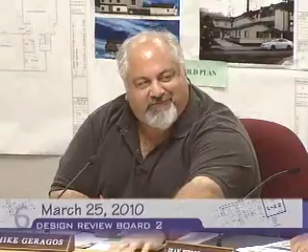Oral communications. Is there anybody in the audience who wishes to speak on an item not a part of this agenda? Everyone here wants to speak on an item on the agenda. Any speaker cards? If anybody needs to fill out one, please fill one out.

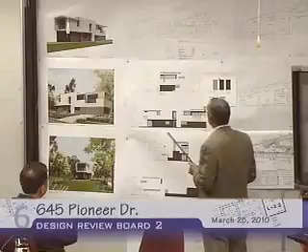When you go through the code and the site analysis, you find that because of the way the site is shaped and the setback requirements, the whole building, in addition to being triangular, goes to another level. Then you end up with an average setback, which sets back the triangle even further and creates these very interesting shapes that jog, especially on the north side, which you see right here on the plan. So that opened up a whole new series of opportunities.

Very early on in the design, mainly in the site planning stages, it was really important to make a decision on direction — is this a site that really warrants a more traditional design, or does it warrant a more contemporary design?

So we discussed it with the owner, and the conclusion was that because of the shape, the setback, and what it was coming to be — this sort of extruded triangular box — we tried to visualize how you'd make something like that look traditional, or put gable roofs in a staggered form. It just didn't make any sense. So it was very clear to us that the more contemporary, modern approach was really appropriate here, and we sailed with that idea.

Now, having mentioned that it's actually a triangular volume that gets extruded, and all these different staggering planes occur — that also happened in addition to satisfying the code.

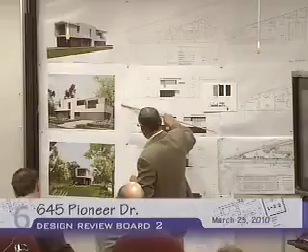So that addresses the condition where the neighbors next door can look at this building, which is over 20 feet high. There's also an overhang with an opening, and we recessed this south plane even further back to create a balcony for the master bedroom, which helps. This part is 25 feet from the front property line; the building here is also 25 feet, but set back another 5 or 6 feet further. So when you're going out the door, you're not looking at a flat plane — and that was very important, and we felt we addressed it fairly well.

As you move along the south side of the building, the idea of relating to the neighbors is expressed by change of material and by creating a horizontal line that relates to the one-story scale of the neighborhood. It's also made dark for that purpose, so it becomes obvious that that's the ground level, meant to relate to the other pieces at that same height.

The upper story is a little lighter in color, and it sort of floats above the first floor. Another reason the color is darker below is so you get the impression that the second floor is an element that floats.

As you move towards the west, we're playing some very interesting games with the architectural expression, where from this plane, which is slightly recessed, you have another plane which is slightly moved in, and another plane moved in again, creating recesses on the ground level for the same reason we did on the east, to create a sense of scale for passersby and people living across the street, so this won't be one vertical plane. Imagine all that being one material - it would be a bit too much.

By doing all the staggering, this last room, the family room - living room is in the middle, family room is at the end. The main thrust of the building is really in this direction because of the shape of the building, so everything tends to point and look in that direction, and the architectural form takes that into account.

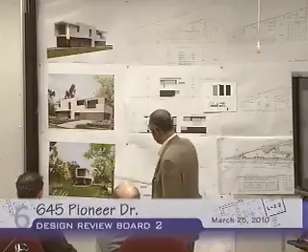Landscaping is responsive to the needs of today, which is drought-tolerant planting. There are some really wonderful trees that our landscape architect put in - these are London planes, which not only define the edge, but also create a really nice, wonderful outdoor space.

We think that this project will be a pleasant addition to the area, because right now there's a freeway wall that you're looking at.

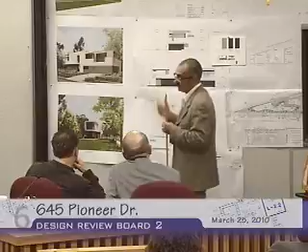You're going to have some shades. So the member is deeper, meaning the structure is shaping it. You might end up with a shape maybe about 6 inches or so below that, maybe more, because remember there are no parapets.

These are basically curbs—you have a curb that comes down and then slopes to a drain. We're trying to keep that as thin as possible, but your question is a good one because this structure can't be independent.

It will probably be added to the main structure. In the section I've done, basically you go up, you slope, then you step, and then you go straight or horizontally across. But when you look through the glass, you'll probably see a surface maybe a foot or so behind there—there's really no other way to do the thin stuff.

I just wanted to see how you'd do it. From far away, because of the reflectivity of the glass, I don't believe that will be that noticeable.

Okay, do we have any other questions? I just had one—same issue. It looks spectacular, I'm very happy with the design.

But it's one of those things where you wonder how that perfect white goes from soffit to fascia to roof, and how that actually looks 5 years from now. So I'm wondering—is that just a drip edge up there? How are you thinking of that?

It looks so great, and then you have other ones where the wall turns in, treating it all the same. The idea is to make everything look like it's one material that can wrap—it's sort of the Schindler concept, where you never actually separated the material, because it's this plastic material that you shape.

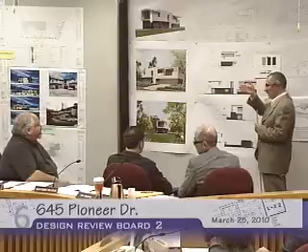Another way to do a drip is to put a sharp edge right at the corner, so it drips down and then gets painted and you won't see it. But you probably need a drip edge at the bottom also so you don't run back, because when water collects on the surface it tends to run horizontal, then you get drops.

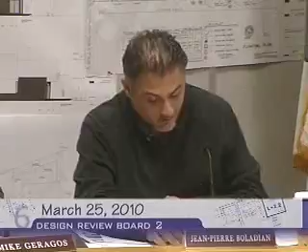In addition to Alan's comments, I'm a contemporary guy. It's a beautiful design, beautiful presentation. I love the 3D modeling. It explains the project on all aspects. I don't have much comment. I love the colors, I love the composition. You answered the two questions I had.

The only recommendation I have, you don't have to do it, is for window B and E on the front facade, maybe if you could lower it down to like 24 inches above the finished floor, it might give it a little bit more presence. That's only a suggestion. Besides that, I have no problem. I love it. I wish we could see more of this type of design in Glendale. That's about it, thank you.

Should I say that I'm a modernist also? No, first of all, I'd like to commend your beautiful presentation. I think it's a beautiful building on a very tight site, and you've done a great job resolving a number of issues in a very simple way. It looks simple, which is a great sign.

One thought I'd like to share with you. I think for the most part you've done it very successfully, because if I was to describe this project, I would say it's about constructing a wall against the freeway to start with. Then you find a series of folded planes that create a series of spaces, and the windows become the negative space between those folded planes.

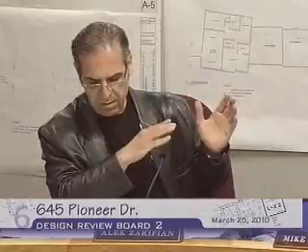One recommendation I have, because of the beautiful garden space you've provided in front, I love the floating plane lifted up from that garden—it reminds you there's a beautiful ground plane and garden in front. Starting from the wall against the freeway and the strength of that as a buffer, you can open up the other side more, and it will be to the users' or owners' advantage to appreciate that garden more.

I think one of the windows that doesn't fall into that description of negative space between the folded planes is this one. I think this becomes more of a punch window with a cutout to accent it. But everything else is very consistently and beautifully done.

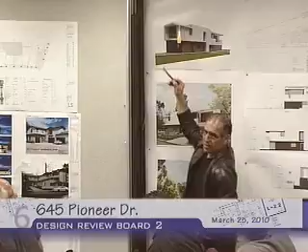For example, if you look at this corner, if this becomes all glass, then this corner window becomes a real negative space between those planes. So this plane becomes even more important, because between what's going on here and the top, there's opportunity to really open up and enjoy that garden a lot more. Maybe the same thing can happen here.

You can maybe let this be more of a cantilever by introducing more glass there to really connect those spaces to the garden. I think that's the advantage that you have started, and I think it's a very natural, good response to that site. So that would be my recommendation, that the composition of this and the dialogue between what that is and what these planes are, the resultant becomes the windows and the open spaces into the garden. So maybe you can consider that and see if there are other opportunities to introduce more windows. That's my recommendation. Other than that, I think a beautiful building.

I also want to say, job well done. Very nice. I've had a chance to do a triangle lot before, and they're always a great opportunity. I do have to say, though, that modernism is well over 100 years old, so what we are talking about is an architectural style that we like. I also like traditional styles, I probably do more traditional than I do modern. So we welcome all styles as long as they are done well within themselves, and this one is done well within itself, its own style. I have no problems with it at all. I think it's very well done.

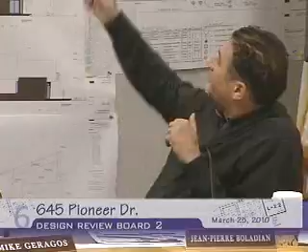You could make it like a strip of 12-inch strip glass, and it might look like the roof is floating. You could play with that. I don't know, I mean it's beautiful, the way it is is fine. But if you guys, I was thinking when you guys were commenting, you have an opportunity there with that great garden. You could have a strip of 12-inch glass, and then it looks like it's floating, that roof is floating. And I would also tell you to go for a variance. It needs a front yard wall, and then you make it all private. So you should go ahead and do that.

Yeah, I'll just say I'll take care of it. Anyway, done. Is there a motion somewhere? I'll make a motion to approve the project as it stands.

And I just want to clarify one thing. I've gotten myself in trouble expressing my personal opinion and telling people that I like modern architecture, which I do, but as Mr. Geragos said, I like good architecture. It doesn't matter if it's modern or traditional, but when it's modern and good, it's good architecture. I like good architecture, well done. So I want to put myself off the hook if somebody's listening, and put that in the minutes.

So, but I would like to make a motion to approve the project as is. Motion and second. That was a quick second. Would you like any of the thoughts in the record of decision, or not? Put them in there, I think he understands them. Were there any that were conditions? Yeah, with the recommendations, creating more openings.

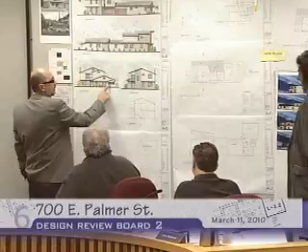Are you replacing the doors? Yes. Okay, and what is going on along here? You're showing landscaping here, but on your landscape plan, the entire thing is paving.

So what is that? This is a picture we took. This is existing landscaping here, so that's gonna be gone, and it's gonna be paving. So everything will be paved? All this, are we proposing paving along the property line?

Property line paving? No, I understand, but about the property line, are you putting a fence? I think there is a fence now. Okay, there is a fence now. And then where would the trash and other elements go?

Trash is here. So these guys are gonna have to come all the way to the back and put the trash there? Yes, they're gonna use the common open space also. That's the thing is...

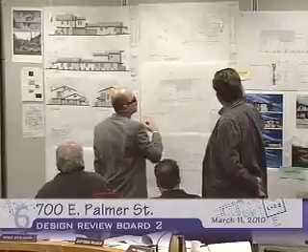For this, the LA County easement, we don't have more opportunity to put anything, any building. That's why whatever is not that much important, we are just pushing it in the back. So we're using this space as much as possible, because almost 25% of the lot, we cannot do anything on that.

So what does this represent? Are they gonna walk on this, is it like grass, or a walkway? We can put stepstones or something like that, connecting it to the common open space.

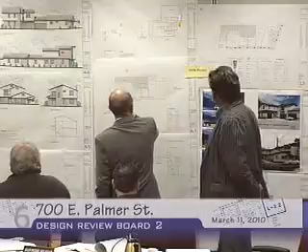There is a landscape plan at the top. There's nothing shown in the landscape plan. Nothing is shown, it's blank.

Isn't that where we're recommending the path to go from the front unit to access the back common area? By the stepstones in this area. Yeah, that's where the path is supposed to be.

Any other questions for the applicant? No questions? Thank you, thank you very much.

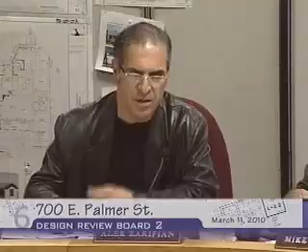The problem I have is that when I look at the building, it's hard for me to figure out the intention of the two colors, or what the intention of the brick is, other than accenting the chimney and that portion of the wall. I think the brick is meant to start telling a story about this very long building with two pieces in front and the back. Is it about breaking the mass down, or is it about establishing a base?

Those are the kind of issues that I was hoping to hear, for me to be able to understand what direction you were taking in terms of making the building more friendly to the neighborhood and how it relates to the neighborhood.

As an example, this front porch seems like it was there and it's kind of remained, but now there are too many gables, and you can tell this part is doing its own thing, and the rest of it just happens to be back there. There's no marriage, no reason to it.

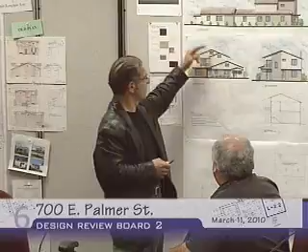What are the pieces trying to do, and how do they come together? For example, if this front porch became part of the trellis structure, it would help the composition, a simple gable with the trellis structure in front, so you won't have so many repetitions of the same thing. Also, in scale, this starts to look so small that it disengages itself from everything else.

Just one example. But if you think about the color idea and the material idea and how the trellises occur where they occur, I think they have to tell a story that is absent. That's something I can't find.

So it goes back to what Mr. Boladian was talking about from a compositional perspective. The windows, there are different types, but none of them become substantial enough to signify this is a house rather than an apartment building.

There are just a lot of small windows, and you wonder if there's a hierarchy saying one is a living space, one is a bedroom. It's just a number of windows, you know what I'm saying. There's a lot of pieces put together, but they don't come together to represent that this is a house.

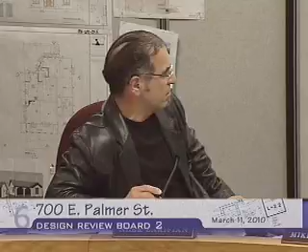I think the same idea goes for landscaping. The landscaping needs to substantially have intentions. Right now, the driveway side is very dry, it's just a big driveway, and you need to represent something on the east side of the property. I can't tell that much from the landscaping plan.

From the three-dimensional drawing, there's much to see also. But at any rate, I think somehow it needs to be pushed to the next level, looking at the windows as opportunities to make things more, have more character and bring more character to the house, from a color perspective, from a massing perspective, from what repetitions make solid rhythms that help break down the mass.

That's my perspective on it. I can't be very specific about what you need to do exactly, but I think you need to find a way of bringing all of this together so the purposes are very simply understood.

Then, if it's a long house, what do you need to do? Do you need to make it more horizontal or vertical? Where do you make it vertical, where do you make it horizontal? That should all, at the end, become a very simple idea, which I think is absent from the design, at least how I can see it.

Well, I've been trying to think how to help the applicant figure out what we see as a problem and how to solve it for him, or give him the right direction. My first comment would be that we have that special book where we've been collecting projects, and this is not a unique proposal, it's a similar type of addition. We've seen many of them, and we've pretty much hands down approved a lot of those projects.

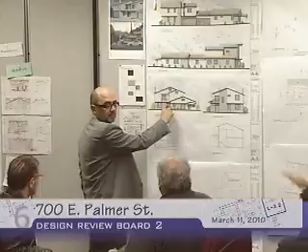I mean, it is going down - he's drawn it that way. It is going down, but understanding it's drawn the same, this needs to be 2 feet lower. Right, you should be lower.

The head height - that means he might be doing a higher door in back, so the top of windows are at 10. He's doing an 8-foot header, back on a 10-foot plate.

You know what it is, Alan? It's 9'4". You're putting a 9-foot header, not an 8-foot header.

Alan, the front entrance door is drawn wrong, maybe. Header height, not plate height. Header height, window height. Maybe the front entrance door is drawn wrong.

So I think what I hear Board Member Malekian saying is that if it were drawn correctly, it would appear lower from the street, particularly in relation to the existing house.

Actually, you know what happened? Because the ground plane is lower - our understanding is that it is lower. You see, it looks lower.

This should have been drawn lower. The door seems to be at the same level at the front. You see, this is the problem. Yeah, I agree, you see? Right, so it is actually...

Let's agree that the site goes lower. So what we'll do is ask for an elevation, a separate elevation section in front of where the new unit is, so that elevation is clear and we understand what's going on, rather than putting them together in one elevation. I'm trying to understand.

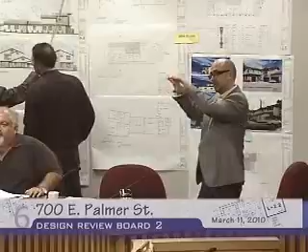So the property is 2 feet lower. The front is 2 feet higher - not drawn that way. No, please, come on, I understand. This is... come lower on back. This is drawn all wrong.

Your window head heights and door head heights are set... you see, almost 8 foot. Are you doing 8-foot doors in back? Yes, 8 foot - there's a 6'8 in yeah, you see?

But the door should be here, not drawn that way. That's what I'm trying to say - the door, not the taller one, is not drawn that way. The windows are the tall ones.

At the bottom of the 10-foot high door, floor joist - this should be... See, the front one is 6 foot 8, 9 foot door - the back one is an 8 foot, much smaller. How tall is your door?

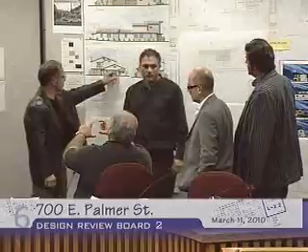So the heights are the same - 8-foot door here. Over here, this is an 8-foot door. Look at that, over here?

That elevation is wrong, right? Yes, you see this one? And this - no, this is not the floor level. No, the back floor level is lower, here.

Alan, the front one's a 6-8 foot door, this higher one. This line here comes across, and it's lower than that, right? And then here, that's the same line, right? If you come across, it falls under this.

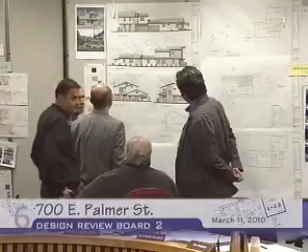So this door is a very tall door, 8 foot basically - the bottom of the door is 2 feet lower. This is an 8-foot door. This is like a 6-8 door.

Yeah, 6 foot 8. Which means their headers are about the same - actually the headers are about the same, this level with this level. So you can see the floor is over here, lower than the first unit.

So if we keep the height the same over here wherever it is, we'll be able to have almost the same level of windows in the first unit and in the second. I think the perspective is more accurate or more realistic than the elevation.

No Alan, this is actually not the floor level. Okay, I understand - floor level is here. This is just a trim on top of the windows, an 8-foot... I understand that.

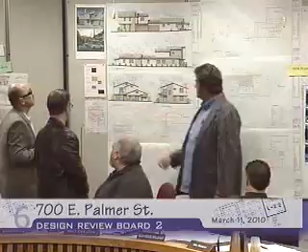Okay, let's continue on with - so what are we now gonna do? Going back to your question, should we lower it 2 feet?

I don't know if it's really going to help. Were you referring to the 10 feet at the second floor? No, I thought it was 10 feet at the lower ground floor level, because there's an extra 2 feet in the back building that we could lower if you thought it was necessary. No, I don't think it's going to be a big deal. Okay, fair enough, fair enough.

Okay, what are the conditions that we want to put on that, other than our recommendations and considerations? I would suggest a preamble to all the conditions that Ms. Giazand mentioned, that would go something like this: overall, the project is a simple design. The fenestration, entries, and details need to be revised and refined to improve the overall design. Elements of design should have function and significance.

That seems to broadly reflect what we're hearing, and I think all the specificity you've provided will also help the designer in moving the project forward. There was one piece you had asked for in the previous application that I'm not sure was fulfilled in this one, and that is requiring a landscape design by a landscape architect. So if you'd like us to include that as a condition, we will.

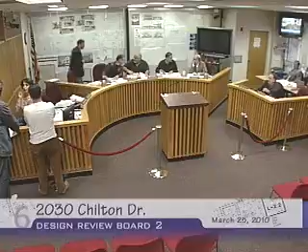Where are we going with this? Just gonna go through. What the hell is this? Yeah, I know.

Chairman of the board, I'm just putting up a couple of exhibits since this is at the back, and I'll refer to these as we go through our staff report, which hopefully everybody's got.

Okay, Mr. Chairman, members of the board, our next case is over here on the left side of the panel, and we have the project on Chilton Drive, 2030 Chilton Drive. This is a return for redesign, so this is the second time the board has seen it. It was first reviewed on December 10th of 2009. I believe two of the board members were here at that time, and two were not.

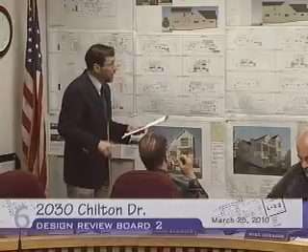The project that the applicant's proposing, let's back up real quick. These are the older plans right here. So what I've tried to do is place the elevations side by side, straight down the line. These are the older plans, of which I couldn't find a nice, neat little card, so I put it over there, and this is the newer plans over here, all the way down. This perspective, this is how this works. We have some photographs that'll go out so you all can review those.

And we also have an overhead view. You can look to see the relationship of the project site here with its two neighbors. This is an elevation down between two properties where it'll be most impacted, right through that property line there.

This project is located in the far northwestern part of Glendale, in an R1 zone. It includes a 93 square foot addition to the first floor, which is a kitchen area, and a new 555 square foot addition for a second floor. The total house size will be 2,181 square feet, just under 2,200 when completed. It has a two-car garage at the rear, detached. There are no changes there.

The project is located in what they call the El Miradero area of town, which is a district with period homes and Spanish colonial revival homes. This neighborhood has a lot of those types of styles, a lot of Tudor homes, you'll see several of those as you look through the elevations.

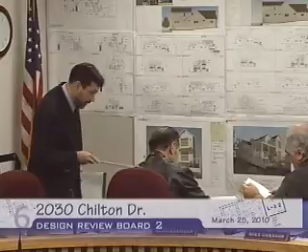Right. Oh, here it is. I highlighted it. It's kind of hidden, you can't really see it, and that's one of the issues we'll go through real quick and discuss with you.

When we look at the three categories that planning tends to look at, which is your site planning, your mass and scale, and your building design and detailing, overall planning felt that the revised project, the applicant did a better job of addressing the board conditions listed in the staff report. I think what I'll do is jump ahead and go straight into those conditions, because as I discuss those, I'll pretty much be addressing each of those three categories and give you an overview. Then I can back up and answer some questions if you have any. So we felt that overall the project did a pretty good job in meeting the board issues.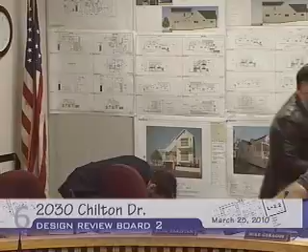So if we go to the different conditions, and we look at the first condition, which is to articulate the east and south sides of the house to break the long roof forms and wall forms. Initially, this is what the board was looking at right here. There's a concern with this area, sort of a disconnect, but this was staff's recommendation at the time, and the applicant faithfully followed it, but the board did not care for it. So in return, the applicant tried to unify this and complement the way...

...the gables, the way the eaves work with the existing house. And the existing house, you can see, is right down here. This shows all your existing house plans. So you can see how he's tried to complement it, and that's one of the issues that the board had wanted them to do.

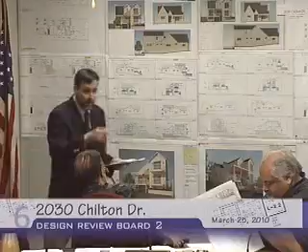Now, one of the things that staff raised, and you can see it in those photographs, was we have this large wall form here, which you can see down through here, but there's very limited visibility, certainly from the street. In fact, when you look at it from the street, because it slopes down, the street comes up like this, you only have a small view of the top of the house. So it's not that large a view from the street, and it's pretty much hidden as far as the landscaping goes.

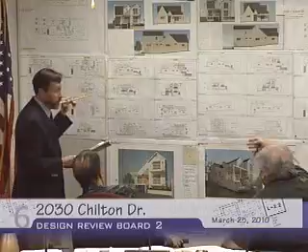Just while you're there, let me interrupt. You were showing a fascia on that side. Right here? Those two planes are the same, though. Yes, that's correct. That was just two planes. It was more meant as an effect to kind of break up that mass through there. But that's the old design. That is correct, sir. This is the old one. This is the new one.

The second condition is to design the proposed roof form to be more uniform with the existing roof form. So they worked to try to get the pitches and roof forms modified to be more uniform, and to try to emulate more the original Tudor look. As board members who were here before know, sometime around the year 2000 the project morphed into an eclectic kind of look, so the board asked if it could be brought back closer to that original style. We felt he is meeting that intent. The easterly roof form here was just different, and they tried to connect and unify it to complement what was out there. The same thing on the west side as well.

There was a large angled trellis element in the back. Board members asked him to remove that in condition number 3, which he did.

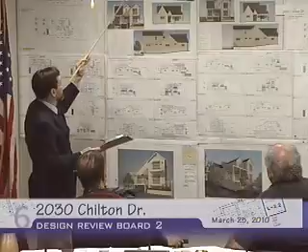On the front of the house, this was kind of one of the little add-ons that wasn't quite accurate, and so this little hat element was added on without permit, and it just kind of stopped. When you looked at it from the side, it sort of came and stopped like this, and now it comes and continues back into the existing roof line over here, and the applicant has done that.

Some of the smaller details, we asked him to continue some of these little diamond vents around, which he has done. They weren't all there. For instance, you can see on the back they had these elements here, so they're bringing that around.

Then we asked him if he could simplify and unify some of the other designs. On the front windows, if you looked at the photographs, these tended to be big foam mold trims. The columns were not consistent with the Tudor design, so he's brought those back to where they are more consistent with that type of design.

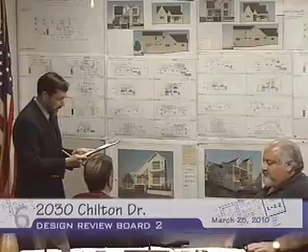And the light fixtures and railings, the applicant is requesting to maintain the ones that are out there. You can see in the photographs they pretty much show up, but they tend to be kind of subtle and not really that visible, and staff didn't have a problem with them. There's a couple of code issues that the applicant is aware of, and they're planning on removing them.

There's a landscape arbor here in the driveway. Unfortunately, you can't have it. It's very nice looking, but it doesn't meet zoning code. And there's a patio area by the pool attached to the garage, which is another code issue, so the applicant's going to remove that as well.

I would like to say, as I wrap up, I made an error in when I wrote something. There's a discrepancy. The planning staff is recommending approval with conditions as listed, but at the very end I had written return for redesign. So on the front end it says approve with conditions, on the back end it says return for redesign. We wanted it to be approved with conditions, and just wanted to make that clear to you. That pretty much concludes it. I can go back through and go through as much as you want.

And... Questions for staff?

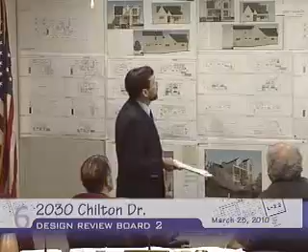How do you guys feel about the west elevation? Well, the west elevation, actually, we didn't have a problem with that. It's recessed in. So the west elevation, they're calling this the east. I actually think that's the west elevation right there. This is the east elevation. Well, the east elevation, how do you guys... this one here? Yeah, or this one here? The bottom. Okay, well, no articulation, nothing.

I know it was a concern, but I think one of the issues we thought about was the visibility of it. It's really not visible, and so the applicant has made his arguments, and we're going to go with them. If you'll note, I placed in there his arguments that he submitted to you about trying to maintain the existing wall forms, not breaking them, and things of that nature.

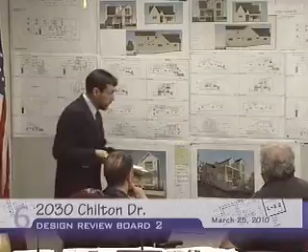That's his argument. And nothing about the large bedroom window, balcony, the door? Well, fair enough, that's a fair question too. When you look at this balcony, looking over this opening here, he has an inside balcony rail. This would be the exterior here, and he shows like a little interior balcony rail. That's a section view that he showed there. We felt that this view is pretty much limited, and you can see in the overhead, limited just straight out the back here. I'm sure you can see over here, but it's not the same as having the very large window here. And they're introducing only one small 1x3 window over on that side of the house.

So the rest of these are pretty much all on the same ground floor. On that site plan, is the whole bedroom past the existing house on the upper side? Yeah, that looks like for both the existing and proposed. So the first floor bedroom is already like this right here, but the second floor addition is out. That's correct, the second floor addition goes directly above it. He's trying to use the same frame structure, is what he's trying to do.

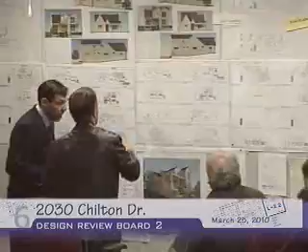One question I have is, this area is a flat roof? Yeah, that little part there, that is correct. What he had is he is extending and making it flat. It was going to be like a little trellis element here, tied in with this angled trellis element right here, and so he's just making it into a flat roof.

Yes, I have a question. What's the maximum height allowed in this? 28 feet, sir, for a single-family R1 zone with the 3 in 12 roof that it just has. Okay, any other questions for staff?

Okay, thank you. Pete? No, I have to go last. Alan. I can. No, okay, sure, go ahead.

Yeah, I think actually the new design has made a lot of improvement.

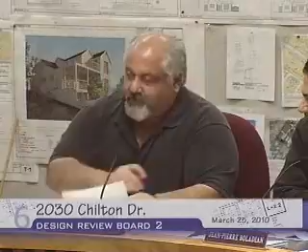Name and address. Alex Sarkisian, practicing architect in Glendale, 520 East Glen Oaks Boulevard.

Where's the new model and the site piece? The model is safely tucked back at my desk. If the board would just hold on a second, I'll go back there and get it. I would like to have that. Yes, sir, because we've looked at it.

Sure, this is a very, very modest project, and it's been a challenge because I inherited a number of problems in a project that I had nothing to do with. But nonetheless, we've tried to follow the four recommendations and considerations. I think we've covered every one of them, and we have looked at every one of them. The problem with the issue that Mr. Boladian really proposed is I have such a small footprint.

I wasn't able to move it because I have essentially a 12-foot element, which is that vertical little element existing, and I'm extending that. To set that off would play havoc with the structure, because I'm trying to contain it. It's a really modest house. In my opinion, it shouldn't have had this remodeling.

I explained, I'm sorry, and two of the members were not present, but the owner has to stay here because of family reasons. They own three houses - the mother lives with them, the sister lives across the street.

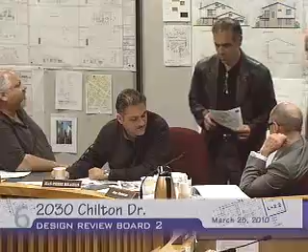There's an overhead photograph right there. No, in your hand, right there - that should be able to give you guys perspective. I just want to understand from his model - is the model correct, or is the site plan correct?

Isn't this the same elevation as you have on your existing? Because there are identical homes, copies of each other almost. Does the house go all the way to the back like the other? No, it doesn't. I think they line up in the front, and this does not go in there.

So that's the drawing, correct? More correct, yes, it's like this. Okay, I was just wondering which one. By the way, this is an aerial picture. Look at the photo right there, that probably gives us a little idea too.

Right, no, he brought in a model. I just wanted to know which was correct, that's all. I didn't think you could all park together.

So we took the gingerbread out of the front columns. I came up with a more, what I would call a wood detail for the columns. We have taken the trellis off on the other side, which I felt was blending the roof. And we took the balcony on the second floor, which I had once proposed, to take the aggression out of that two-story element. So I've created a small balcony on the side for them and take the aggression out of the front, because I had two balconies and I took one off.

So it's less of an aggressive elevation. On the sides, I have only one little window, it doesn't see anything. By the way, I had a neighborhood invitation, I invited all the neighbors to come in. Nobody showed up. The only person who showed up was the next-door neighbor who wants to do a remodeling similar to ours. That's the bottom line.

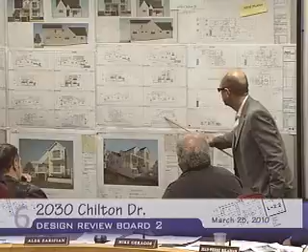Anything behind that, I would go. There is a solution, it's just a matter of how much of the house are you going to really tear up for a very modest addition, frankly.

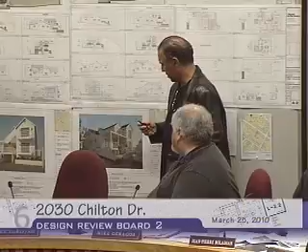It's just the piece that I can't really make sense out of is that this is such a flat, different language from everything else that I see in the house. I wish there was a way, for example, the columns in front, if there are columns, then can they be similar? Or maybe this really becomes such a very horizontal piece that it disengages itself from the columns, so the columns become pillars that hold this very horizontal piece, and this turns into like a real porch that has its own kind of character.

I think this part of the house just completely... I'll be happy to duplicate the columns. We'll talk at the end. Yeah, but I think generally I

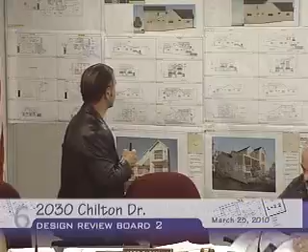don't have big problems even with the big height that it has created. I think the house has gained a lot of character somehow to me. It kind of starts with a big mass and then starts to become - it's almost like the roof. The roofscape is a landscape of its own. It's a very interesting kind of change.

So if there could be a solution that really integrates this into the rest of the house, I think that's the only issue - it's a detail issue, how you make that. You can talk at the end. Different, so that would be

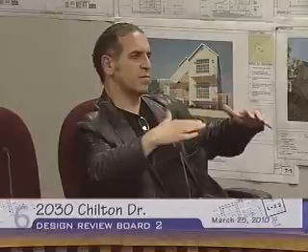my recommendation. So my point of view is that the building has moved in a direction that it almost needs the mass to start to kind of change into these valleys and then break down and get to the street front and become of a different scale. That's in a nutshell.

First of all, I think I'm glad that we made Mr. Sarkisian remove the trellis. I think that was a definite negative towards what the ultimate achievement of this building wants to be.

With all due respect, I do disagree in regards to the pushing back. I think there is a solution. I think there's always an argument, but I think we're here to look at the design and find the way that we feel the design is appealing.

I personally don't have a problem with the two-story volume. I was just trying to find the solution for Mr. Boladian, and I just saw that there is a solution if we go towards that direction.

I think that the volume that it's created is interesting. My problem is the repetitiveness of the windows, the quality of the windows, and the architecture that it's trying to be versus the materials that exist and it's kind of being forced into.

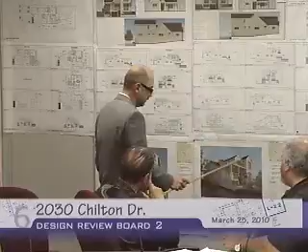I think Mr. Baxter, you mentioned the Tudor style at one point, which is fine if this is a Tudor style - but the only thing that somewhat dictates it is the pitch of the roof, which is not even anywhere close to that. Tudor style has its details, it has its sidings, it has this breakup of the plaster, which this is pretty much just a plaster box. So I still have a major problem with this area.

I think it's much better than what it was. I think a lighter solution at this end was much nicer than a solid solution, but I definitely think this needed to go, which I really like.

And at one point I was thinking maybe even if we agree that we want to keep this volume, maybe the balcony needs to be pushed back so that this volume is there, and this balcony railing needs to be a lot lighter, less of a presence, and we may want to even think about just completely removing this.

Yeah, I think something needs to happen because having a balcony next to a flat roof just doesn't - it doesn't happen.

I think I have a solution. Okay, and if you do, I mean, I'm glad you guys have, but I see the problem. One solution would have been just taking this, push it back, have the balcony extend over, and create a balcony there.

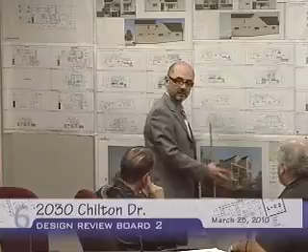But again, I kind of like this. I kind of like that, but I don't like the window selection. It just seems like a leftover of what it was. It's just a sliding door, a huge sliding door, but it has to be fixed glass, I guess.

No, it's a door. He has that railing. That's his detail. French door is also opening. This is the detail for here.

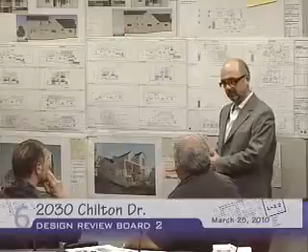The rendering shows a railing inside, not outside. There's railing outside, I think we need to definitely look at that. I think details are being forced to make a design happen, such as this detail, and there's definitely a problem. No, it can be done.

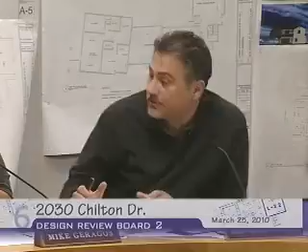There's improvement from the last meeting. I mean, there's still some issues for me, in my opinion, to support this project, but I have some solutions. I still think there's room for articulation. I'm happy that we got rid of the trellis.

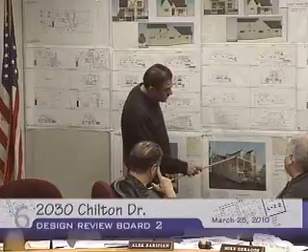I think the problem is this becoming almost the most dominant elevation of this house. The front, we don't have anything. This area, I think the problem, what we were talking about last time, is the articulation. If he doesn't want to push this elevation back, he needs to push at least at this point a little bit in. And then this area, which is almost flat roof area, is a problem.

I think by articulating that deck, whatever that level, maybe 12 inches in, that will create some articulation. Then introduce a mix of parapet height, a flat parapet, make this a true deck area, like Mr. Sarifian was saying, utilizing the thicker parapet height ending towards the existing roof. Then bring some Mediterranean/Tudor design to make this element much better. He needs to work on these columns, create something, introduce more Mediterranean feel. It's kind of too boxy right now at this corner.

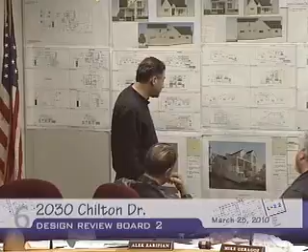I think he needs to play with articulation, the scale, the column, the proportion of the column versus the railings. I have a problem with the railing design, but I have more problem with this area.

I think he needs to address it, because this elevation - where are we? Over here, I think it's an interesting room area, the second floor. It's becoming a nice... it's the master bathroom, and it has a balcony. Such a nice place to go outside and enjoy that deck, but I don't think he's celebrating that space yet.

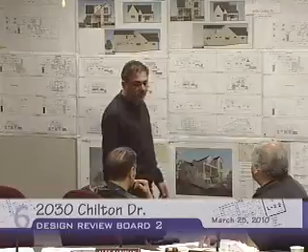I think you're just ignoring it. You should open up and talk to the client. You need to celebrate and make that space more user friendly and inviting. Right now it's like nothing. I know you're talking about the economics, that it's hard for you to articulate because you want to save. I mean, it's a modest house, but without moving this stair, just shifting this even, you could do it.

I don't think it will add additional hardship in construction, and that will solve the problem with articulation from the other side to avoid this whole big blank wall. I don't know, that's my comments.

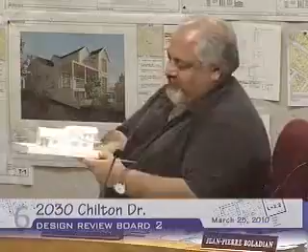I think what might be helpful is, glad you did the models, very helpful. If you see this pitch right here going on a longer distance, take that same pitch and just put a hip roof right in here at that same pitch. So this would all be pitched roof, down lower, and it wouldn't matter that that element is lower, and the balcony is the element that pushes through the roof structure, so we can get a hip roof on this corner.

It would probably come up right about where the window is now, but you don't need the windows as low as you have them. They're countertop windows, for the bathroom countertop. So these could be lifted up slightly to allow the actual pitch, saying a hip towards the back. Yeah, you're pulling a hip right in here, pitching here and pitching here at this pitch.

You see that? Yeah, I was thinking this could just hold all the way if possible. I was saying to avoid a flat roof, fighting the style. So I think by doing that, there's the problem that the second floor is going to be higher and the balcony is going to be higher, so you'd generate a lot of area here, kind of bulkiness above that. So I was hoping that you push and then utilize that space.

Well, he's saying they don't want that.

The flat area is exactly at the floor level. The original roof sloped further down, but since I'm walking on it, that roof now it's flat at the floor level. Exactly. It is now proposed to be at the floor level.

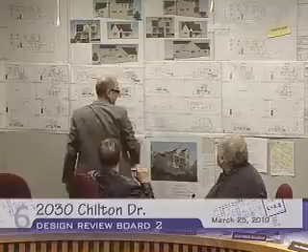Thicken the floor so the structure of that balcony is thicker and the columns are more substantial, and the columns should be lined up with the edge of the wall, meaning this column should be placed right under this so it will support the edge of the balcony, and this whole thing comes out. So this section is out, this pushes in, the column comes in, this is thicker.

That's my thing. The other issue is I'm not sold on the sliding door with the railing behind it. I think we have a good opportunity to come up with a nice design there. I'd like to see that vertical element of the windows created. I'd like somehow this to be depicted as one volume, with the windows placed such as maybe extruding or adding a volume around the edges or perimeter of the windows to create depth. Then the windows are recessed in, and that window is part of some siding or material—I don't know—but that whole thing becomes as one. That might make it very vertical.

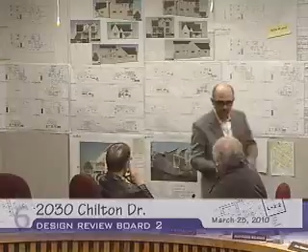Yeah, I think that's what I want to do, because right now I think it's... oh, I'm looking at the wrong one. I think it's just... no, I agree. The second floor should probably be a door, but I think tying the two together—I'd rather see it pushed back in rather than one piece window. There'll be two vertical. I like your motion.

Either way, I have a problem with the window with the railing behind it, so if you guys have a solution for that... I like most of what you said. Are you open to dealing with that corner, though, if they wanted to think of a way that could do it, either pitching the roof or something? The problem with adding a volume in that corner is I think it starts taking away from all the addition they've created in the back. I think they have other, lighter solutions they can do.

If we add a roof over that, or another pitched roof or any other structure—so you're open to the pitched roof idea? I think I want to. I mean, I would be open if we... I have a simple idea: if you have like a detached kind of trellis floating there, something very simple, something organic. Because by replacing the railings and lightening that corner, I think it's just going to be a lot lighter than a plaster box.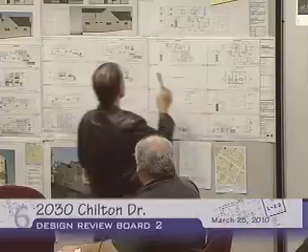What I noticed was that this edge at the first floor is set back from this line where that edge of the balcony is, and you can see it. Yes, I know exactly what you're saying—it has a column there. Exactly, right? So if you push this, you can use that space and make this really aligned with that. Then all of a sudden you have a zone here, and by making the column belong to the underside of the balcony, I'm trying to find the balcony edge here—there, right? It's right there, exactly.

So then you can turn this into a trellis—then it makes complete sense. The balcony becomes part of the zone of the trellis, and then this is completed and aligned. Maybe as an extension of the roof—what you do here is extend this roof from this point to this point. Exactly, right.

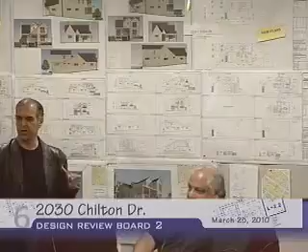That kind of gives you a clear definition of what's balcony, what's trellis. Definitely agree. And is the trellis pulled back from the face of the wall, so it doesn't touch the wall, so the edge of the roof reads clearly? Yeah, you can detail it in a way that doesn't become like the wall. It becomes its own thing.

I have a sketch here. I think if you simplify that, the balcony happens within the zone of the trellis, and there's a kind of clear zone.

First of all, I don't have a problem with Mr. Malek's suggestion of pushing the balcony back. That's not a problem. It's a balcony, it's a roof, and it can be anywhere. I fully agree we can push that. And I think Mr. Karifian's suggestion is also very possible. I think both of those work, so we can get going on this thing. It's a client we've done a big building for, and we're just spinning wheels on this little thing. Thank you very much.

Okay, in terms of the windows, how do you want to treat them? If it wasn't permitted, we have flexibility on it, but what's the feeling of the board? The windows, we're done with that permit, and they're a very minimalist style, not even an external applique for the grids. Interior appliques, actually, but not on the exterior. Also, if you look at the proposed front, it's that very bottom.

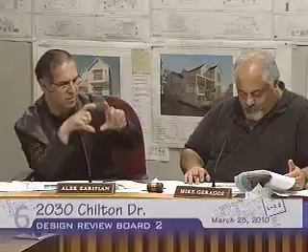Yeah, I agree with Mr. Malekian about the sliding doors. I think those are so prominent, they need to be the right thing. I would at a minimum address those windows. The rest, if they're consistent, I think they're fine. But is it okay with the French door that just has the small bottom, or do you want a more substantial bottom? I would change those two windows to be maybe French doors or something different, with the guardrail outside of the door, and the doors open in.

And just do a flush railing. Chair, can I interject here for a second? This is the second time you've heard this project, so you will either need to approve or deny it tonight. I wanted to make sure, but we can approve it with conditions, right? Sure, you can approve it with conditions. I just wanted to clarify that. Thank you.

Okay, so we're in agreement then on repitching that side roof, doing an open trellis balcony, and I'll say it, I have a problem with the French doors. I think it's very inexpensive, the ones that just have the tiny bottoms. I would like to see a more substantial bottom to the French doors. We're suggesting to change those.

Right, but is it to a swing door? Yeah, to a swing door. Well, I think the swing door is a great idea. What it needs to be, if we're going to do it, is make those two consistent, the top and the bottom, and maybe come up with a nice, very simple Juliet balcony element attached in front of it, with a simpler railing. If they're both consistent, a simpler system rather than such a flamboyant kind of rail, it could be very soft and simple, not a straight, detailed two-dimensional one. I think just the combination of the color, the type, and all of that makes this thing work.

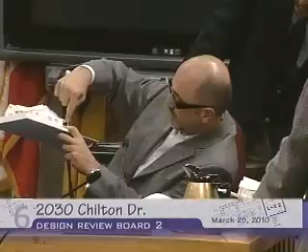Okay, so do the right thing, please. If you turn it just—well, let me explain to her first, and if you can just stand there, I'll explain. So if this can come out flush with this roof, so that it's in line with this, and then the rest of it is cut off, and the rest of it will be a trellis.

That's the idea of softening this area. It becomes, I think, a trellis—that's what you want, a trellis element past the wall. I'm trying to explain this. Do you want me to just show you? Do you want to maybe come mark it on there or something?

No—see, the first thing is that this edge and that edge, with this pulled out, there's a column here that's missing. So that is very simple. Then this becomes—the balcony becomes part of this, which is pushed back. This edge would be there, to there, in the back.

The column here at the back? Yes, I know, but I kept hearing the column should occur right under that, where the corner is, in line with the building. Yes, sir. And the same detail—a little bit more—just restudy the back balcony.

Okay, we may not be able to wordsmith that, but I think we understand it sufficiently to work with the applicant. Thank you for that explanation. Revise as per discussion and direction.

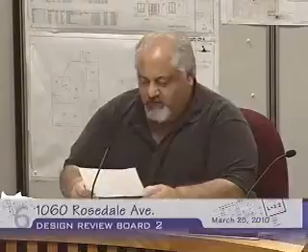Any questions for staff? No, okay, seeing none. Ron Levy, please state your name and address please.

Good evening, my name is Ronnie Levy from Studio by Design. The address is 10935 Camarillo Street in Toluca Lake, California. I'm the designer of this project. I took over from the owner who tried to do it himself three years ago.

As you heard, I think most of the recommendations were addressed, and I think the only quote-unquote problem that staff has is the wider pitch. The rest of it, if you look at the recommendation list, some of them we agreed with and can be incorporated into conditional approval. But looking at the massing of the building, I think it's reduced dramatically from the original proposal done by the owner three years ago.

And I don't know why there is a problem to start with the wider gable. I don't think it does any disservice to the style of the house. Actually, a wider or flatter pitch on those Spanish-style houses is more common than a steeper pitch.

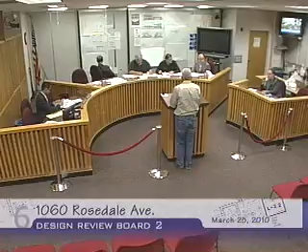You have these sliding doors in the rear elevation that are off the floor, off the grade about 3 feet. What is that about? And you do the same thing with the windows in the front—it's sitting right on the floor line.

Well, the sliding door at the back, which is 3 feet above the floor, was actually installed by the owner. So back then there was no landing there, because I don't think it would pass the building department. It's just across, in front of the garage entry. So this is something that I inherited—I mean, the owner wanted to maintain it.

I guess if the board will recommend to make it a fixed window or any different opening... well, first of all, you're not going to be able to pass... You're right, I agree with you. I mean, it's kind of like, you can't put a step there, so obviously, because then you're going to encroach into the backup.

The other question that I have is, my assumption was that all these windows that I'm looking at—I thought that we're replacing them, but what you're saying is it's existing and you want to keep that?

Can I see it? Is that what you're saying? It looks like they're all changing. Yeah, it seems like they're all being changed, right? They're all different than the picture. Right, they're all changed. So if they're being changed, then why are we putting the same illegal type windows in the back and on the side?

It's 1 foot off the ground, you're putting the windows, I don't know how that's going to work, but the ones in the front of the house. Why is it illegal? I don't understand, what's illegal in these windows? You said illegal?

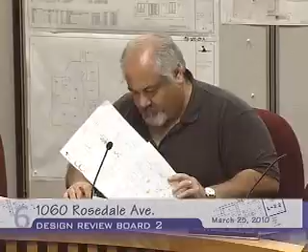First of all, I'm kind of sad not to see these kinds of details because I really enjoy seeing hand detail. I think it's an amazing detail that you originally submitted, so I really learned a lot about what was being proposed. I think it got a lot simpler. Unfortunately, I don't have a section, so I'm not really seeing exactly how this new roof is being attached to the existing parapet, so I can't really address whether the height is being raised up higher or if it can be lowered. With the original or previous sections, we could have had a lot of discussion at that level.

But to me, I think there's a set of concerns that I have that it's missing, and at the level of detail that I want to see, having a white aluminum against a white plaster, I think that's really not the intent of the style of architecture that we're trying to achieve. I would have liked to see darker windows against a lighter background, for contrast. The reason I started talking about those windows in the front is that's the predominant elevation most people are going to see.

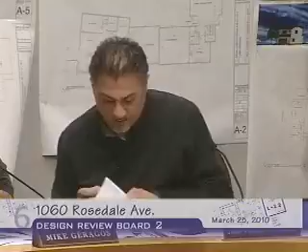If that's the first layout, but the second, the new scheme, kind of, we're not going anywhere. There's a lot of issues. The language is not there, and beside all the normal issues we have with windows and all that, and the roof design, it's not resolved. We have some negative areas, flat areas on the roof. You need to work out a much simpler roof design.

But what I would recommend is, I think you need to go back to the old design, how you could fix it nicely, like Mr. Malekian said, to go with the contrast between the darker windows with the light stucco or finished plaster, with the Spanish tiles, perhaps celebrate exposing the rafters with dark brown. There's that quality. Even the arches in front that you have from the old drawing, decorative tile, maybe a fountain there with a nice Spanish door.

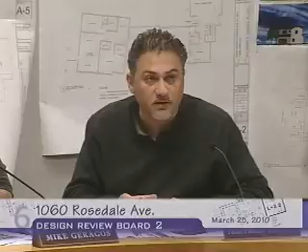I don't know what that number 35 window is, maybe you make it more, move the door more centralized and then rework that more Spanish. It doesn't look right, the designs are not there. You need to go and spend some time driving in Glendale and take pictures of Spanish architecture, Mediterranean architecture, and see how it's nicely done, the details.

Once you achieve that, I think you'll have a very nice single-story house. The first one has problems, the second one has more problems, in my opinion. Symmetry, simplify, and stick to pure architecture and study that before you revise it. That's it.

I like the quality of the drawing of this. The first scheme somehow has a quality that you can see how it relates to the building. I think both schemes can be worked out to be good designs for this change to your house.

I think the second scheme, the windows probably are the biggest problem, aside from the issue of that volume that Mr. Malekian mentioned. With the volume you either have to make it bigger or make it become an element. This upper left one either has to become an element, or the roof has to include that, so this can become a larger piece that includes that as part of what it covers.

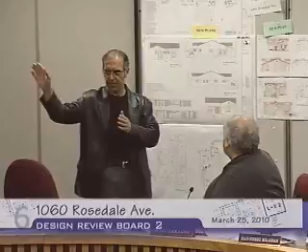The windows kind of go in a totally different direction. You have a very Spanish house and very un-Spanish windows, so that has to come together. I want to keep it general because I like both schemes. I think both can be adjusted to be what they should be.

One suggestion that I think can help this condition is that maybe instead of letting this roof go all the way down, you can step it here so that this roof stops there and kind of continues, and then there's a little wall before the porch, so you signify the porch as its own piece rather than that big roof coming all the way down.

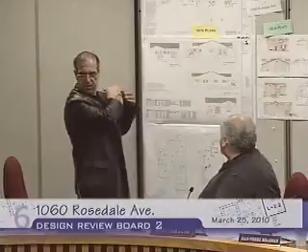I think it's about just little adjustments because it's a very simple project. This suggestion comes from going back to the original house—if you notice there are layers of walls, the original design of the house is about layers, so that porch becomes an additional layer in front of the house in a way.

I think it's a matter of a level of weight for the windows to be the right kind of window, the right depth, follow a Spanish tradition, and it will be just a nice, simple house.

Okay, thank you, I'll be brief. I think all those points are well covered. I don't have a problem with the pitched roof and the way that it's done. I do like the idea just mentioned about showing the porch as a separate element. I guess most of my issues are really with the windows and the doors.

I think what you might be keying off on the existing house is that those are tall vertical windows, but it looks like they're marginal divided lights. There's a lot going on in the window, and those are kind of different from the style also. There's a reason they could do that kind of tall proportioned window, which isn't really within the style, but then you've taken it, stripped off what little detailing there was—the marginal light—and just left the tall vertical window. So you stripped out what little interest it had, and now it doesn't relate at all to Spanish.